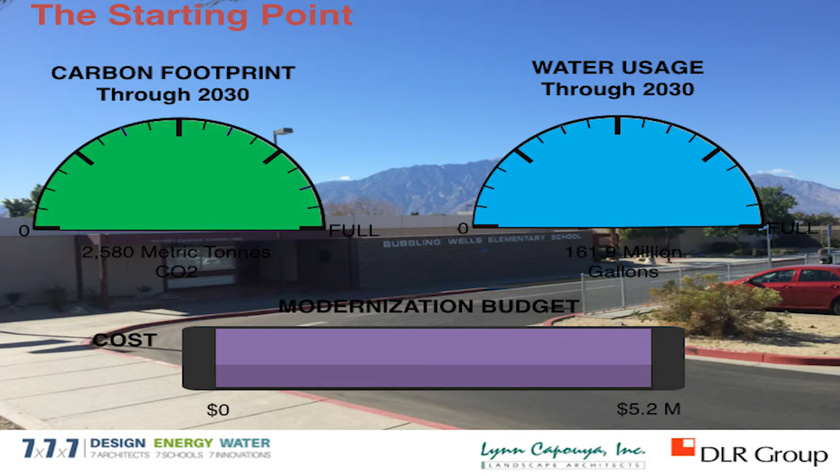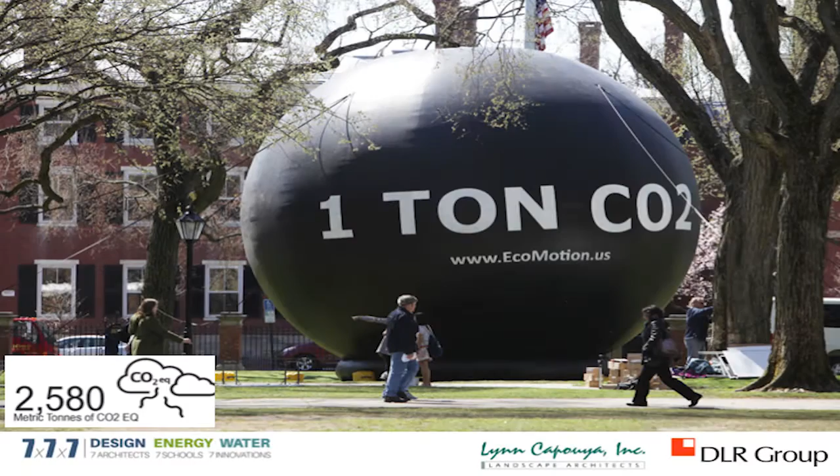So we are projecting that over the next 15 years to 2030 this building would emit about 2,580 metric tons of CO2. The projected water footprint is 161.9 million gallons of water. So if anybody's curious, this is about what 1 ton of CO2 looks like. And about 161.9 million gallons of water would fill 245 of these swimming pools.

So what we were looking at here is taking our zero net energy approach through these series of steps. And then also we'll look at the water reduction. 25% was our target, but obviously we want to go farther if we can. And then we compared this against the OPSC modernization budget, which would be about $5.2 million for this particular project based on their pupil ADA count.

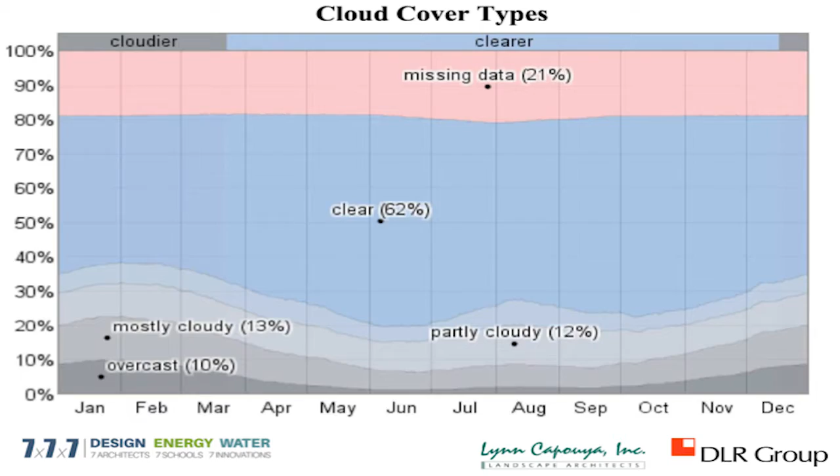So if there's anything other than sand that is abundant here, it's the sun. Desert Hot Springs sees an average of about 330 days of sunshine per year. Making use of the sun for daylighting is logically the most effective way to reduce energy consumption. Tubular daylighting devices have grown more efficient and less costly over the years. Just 4 devices per classroom will eliminate the need for electrical sources of light for the entire school day for 90% of the school year.

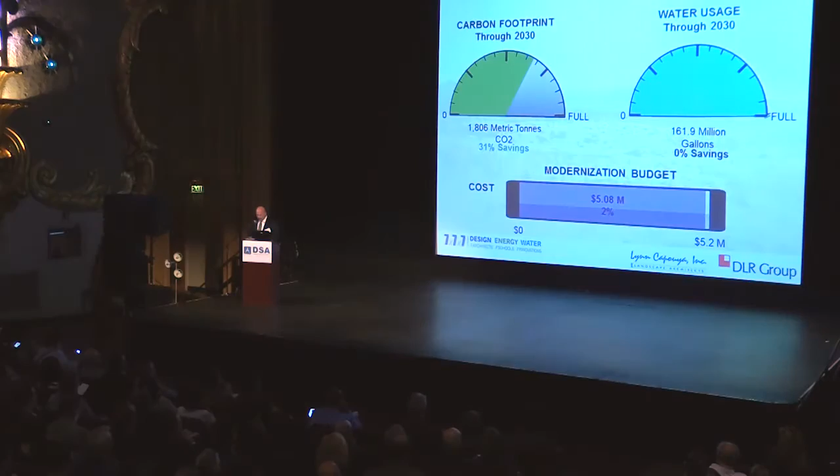That's pretty good. Natural light also offers well-documented benefits for the students' health and learning retention. Along with existing large view windows and the addition of the tubular daylighting devices, I think the learning potential for the students at Bubbling Wells will be significantly increased from its current state. So by coupling this technology with LED lighting for the overcast days and evening use, we can reduce our projected carbon footprint by 31% right off the bat with just 2% of our modernization budget, which is a pretty good ROI at that level.

So let's take mass out of thermal mass. Thermal mass is why the rock outcroppings and caves provided the welcome comfort for the Cahuilla tribes. The same principle is in play with Trombe walls filled with water in the 1970s, to absorb and release energy. Now we can utilize this same concept, but with a modern twist. With biophase change material, or bio-PCM, we can practically eliminate the need for air conditioning, even here. Resembling bubble wrap, this material can be laid above existing ceilings or installed in walls, kind of like insulation. It absorbs and redistributes energy, much like traditional thermal mass elements.

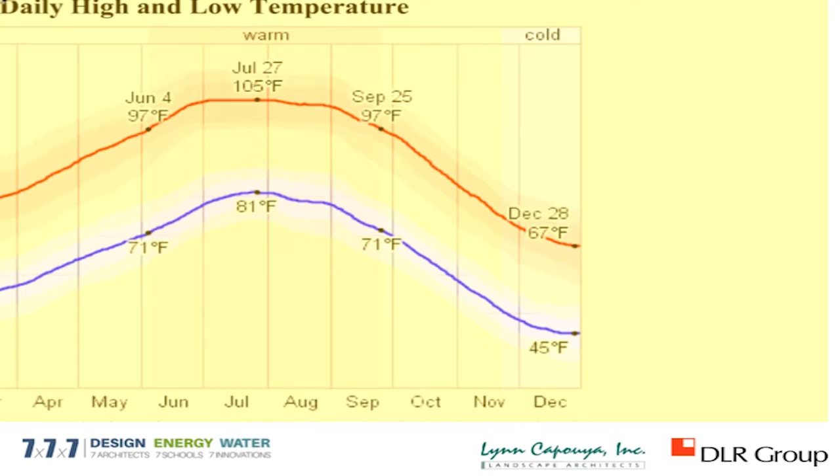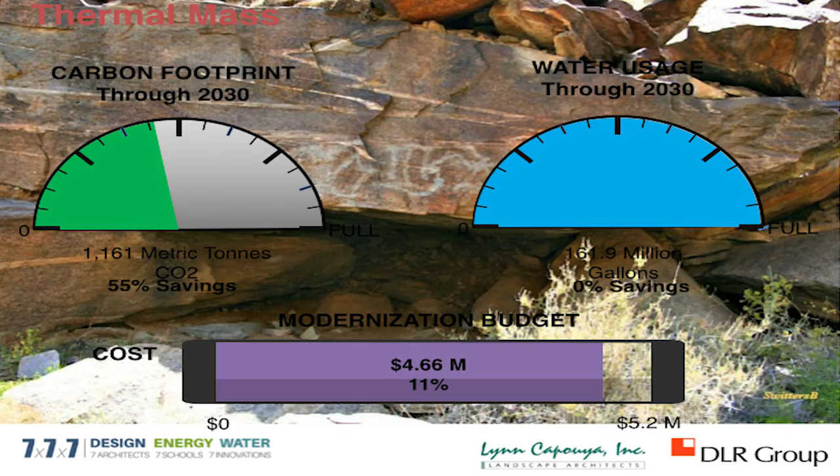Desert Hot Springs has an average yearly temperature range from 45 degrees to 105 degrees. These bioliquid pillows are filled with liquid that freezes, or phase changes, at about 68 degrees, making it ideal for this environment. This will limit the temperature swing throughout the day in the classrooms to less than 10 degrees throughout the year. So the energy savings from the use of the bio-PCM is 24% of our carbon footprint. So we've already gone over the halfway point, and we're on step 2. And the cost for this material is about 9% of our construction budget for 1,200 square feet per classroom.

So, but what about those extreme days that we can reach nearly 120 degrees here? Well, evaporative cooling is the earliest known form of air conditioning. It has been traced as far back as 2500 BC with the ancient Egyptian cultures.

So as we're looking at this, the Adams Hotel in Phoenix, Arizona, which we had an office there, I didn't know about this, first demonstrated swamp cooling, as it was known back then, in 1916, where they draped damp fabrics over the balconies. It kind of came down like curtains, and the air cooled the guests at night. And what's interesting is you can actually do this at home, and it works. I tried it. It's about 8 degrees.

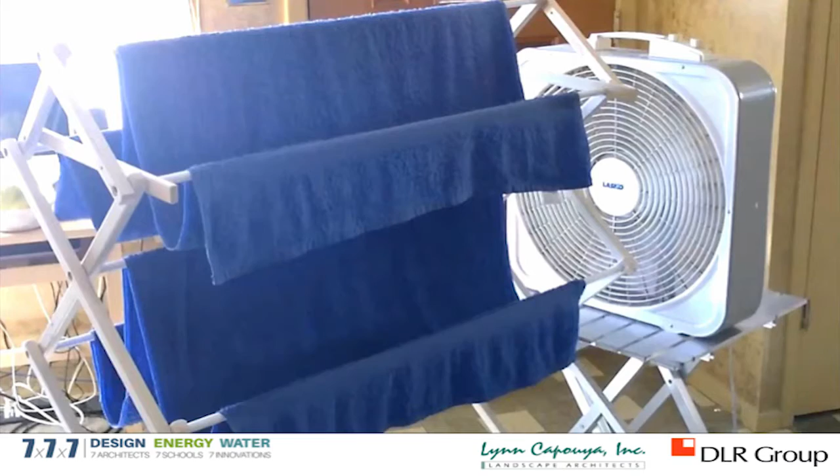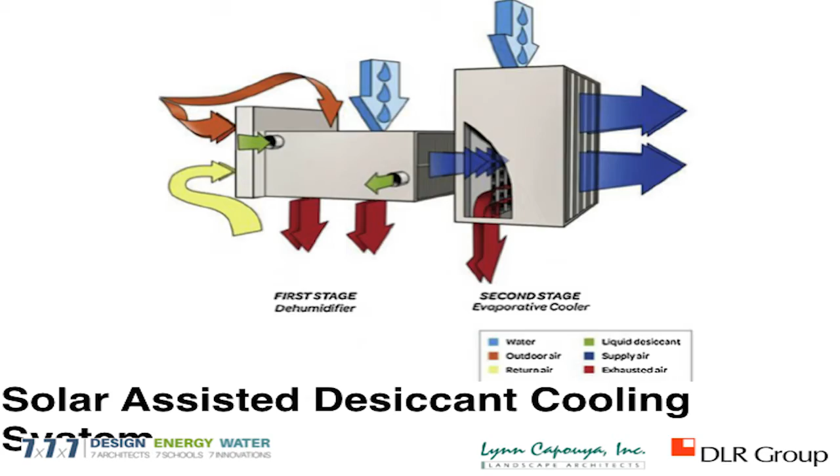So with the installation of BioPCM, the cooling load is substantially reduced. So we can replace the existing 5-ton package units for each of the classrooms with a 1-ton desiccant cooling unit. So these units will primarily run on their economizer cycle only to infuse air into the room to charge the BioPCM material. But they also have enough cooling so it can handle those really hot days.

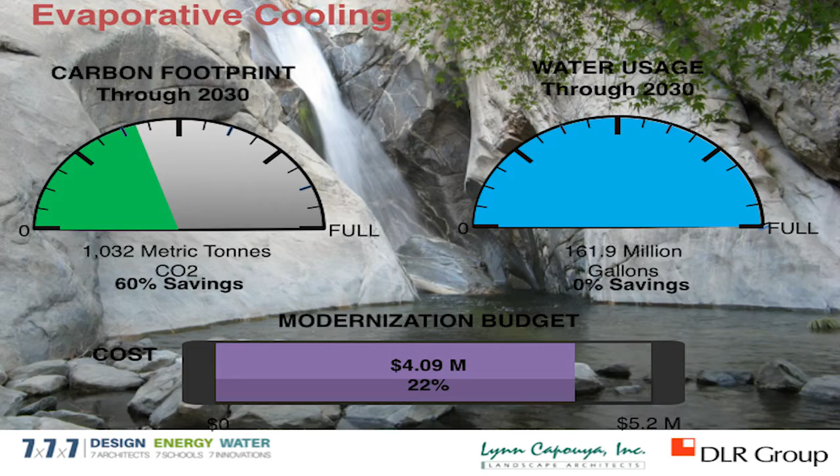So replacing the existing HVAC, it further reduces our carbon footprint. Now we're down to a 60% savings, and this was 22% of our budget now. And a lot of these items are things that you would do in a modernization budget anyway.

So the windmills in the San Gorgonio Pass supply enough energy to power an average of 300,000 homes, which is pretty much all of the Coachella Valley. They have become iconic sculptural symbols, not only for clean energy, but for welcoming us to the Coachella Valley as well. The average wind speed in Desert Hot Springs is between 6 and 11 miles per hour, with a significant amount of days well above 15 miles an hour and greater. So if you've ever been there, you know that the wind definitely makes its presence known. You always know it's windy, especially in the mornings.

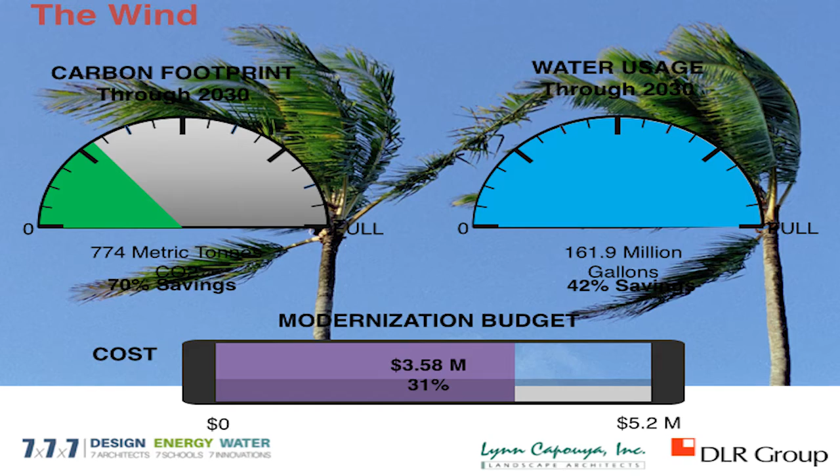So we are proposing the installation of 8 vertical axis wind turbines, each with the ability to generate about 10 kilowatt hours per day of electricity. This equates to about 10% of the total energy needs, or enough to operate the general and emergency lights in all 32 classrooms and support spaces for those rare cloudy days and when the school is in use in the evenings. So perhaps one day the wind turbines at these schools can become as iconic as the ones in the pass.

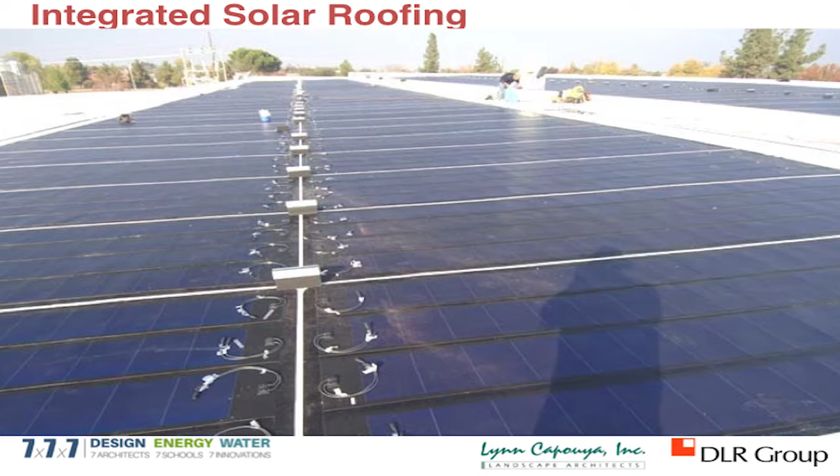So collecting energy from the sun has fast become probably our most promising source of renewable energy, particularly out here in the Southern California deserts. The ever-present sunshine in this particular area can produce energy from 9 to 12 hours per day, making solar collection extremely efficient out here. So building integrated photovoltaic panels are intended to replace conventional materials on the buildings, such as the envelope, the roofing, the windows, even the facades. We're proposing to replace 60% of the existing roof with a thin-film, flexible, integrated PV, adhesively applied to the roof, similar to other built-up roofing systems.

So with the installation of the integrated solar collection approach, our final step here, in tandem with our previously proposed measures, we have arrived at a zero net solution for Bubbling Wells Elementary School. But you want to ask the question, can we go someplace farther than that? And that's where it gets interesting.

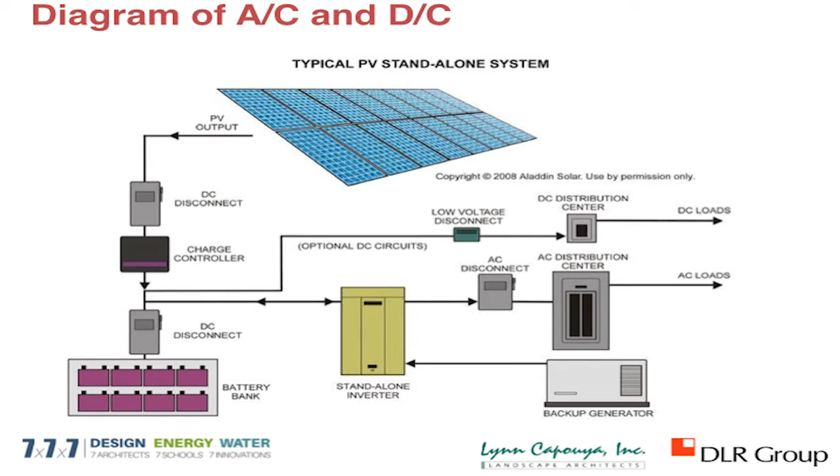So let's cut out the energy middleman. Conventionally speaking, once electricity is produced, we then convert it from DC current to AC current so it can travel long distances more effectively. With on-site generation, there really is no need to transport the electricity. Meanwhile, education has become more and more reliant on battery-powered devices such as computers, tablets, smartphones, LED lighting. All of these require DC, direct current. This means that the AC is then reconverted back to DC via the use of adapters. So a lot of energy is lost in this translation. The question becomes, can we generate and store the direct current for these uses?

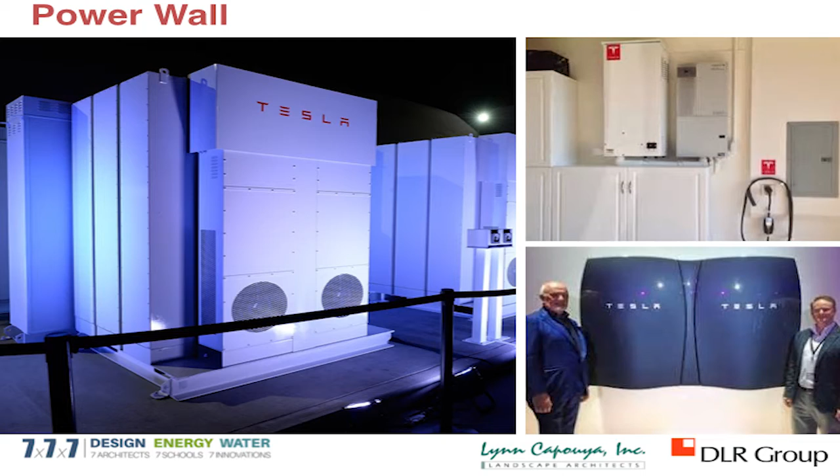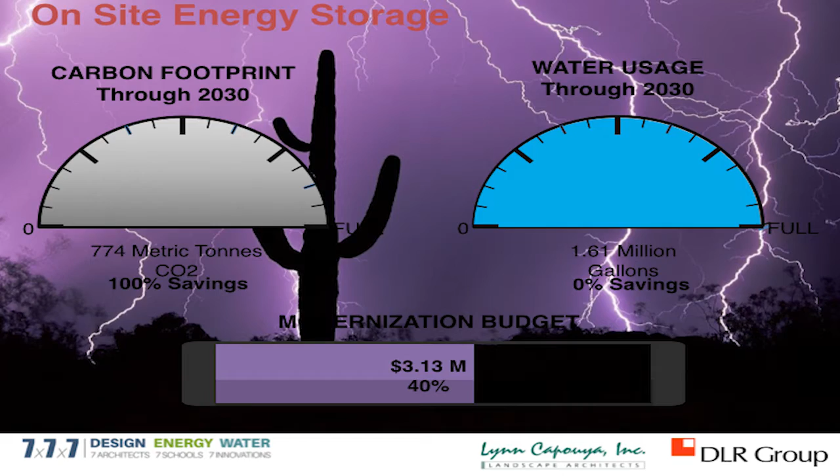And you know, Tesla now offers this large capacity battery storage known as the Powerwall. A dozen of these units can store enough electricity to operate the general and emergency lighting for all the campus when needed, and the educational devices for instruction. And this technology continues to grow and get more efficient because of the competitiveness of the auto industry. So capturing the sun and the wind, coupled with the ability to store this energy, gives us not only the tools for the zero net energy school, but without any reliance on the grid, which I think is our ultimate goal.

So, water. Sand, not grass, is native to Desert Hot Springs. So many schools in California are responding to this recent drought and the stricter water mandates. They're opting to replace their grass with artificial turf. Now, due to the intense heat of the sun out here, this is not even remotely a practical solution for these areas. So once again, we looked at our local history and resources to see if we could find a better solution.

Seashore paspalum, took me a while to learn that pronunciation. It's a common grass varietal used in much of California. Although originating in Africa, a California hybrid is grown locally in the area in the Coachella Valley and Escondido. So the drought-tolerant Bermuda variety is extremely resilient to high traffic, very hardy for hot, dry climates, and most of all, requires far less water to flourish in this area.

So with efficient irrigation, the drip systems that we have, a 15% reduction in the amount of turf on the campus, still keeping some playfield, and replacing the existing turf with the seashore paspalum, the resulting water savings is already 40% of our annual budget. We all know that irrigation takes the most water. But let's not stop. We can go farther.

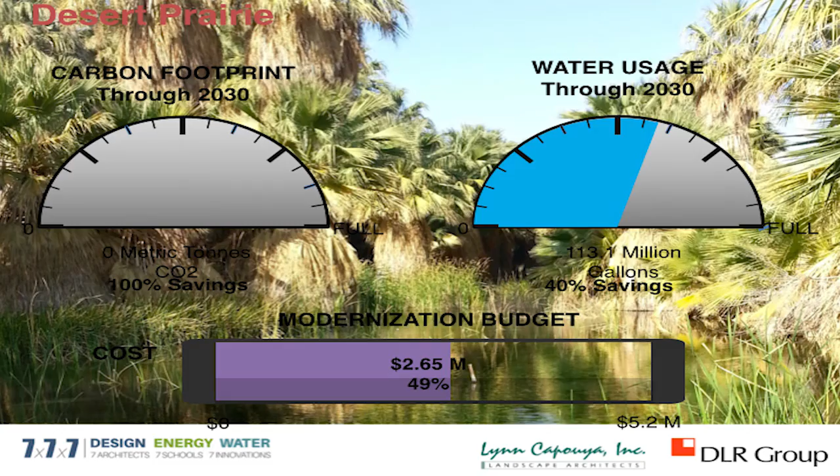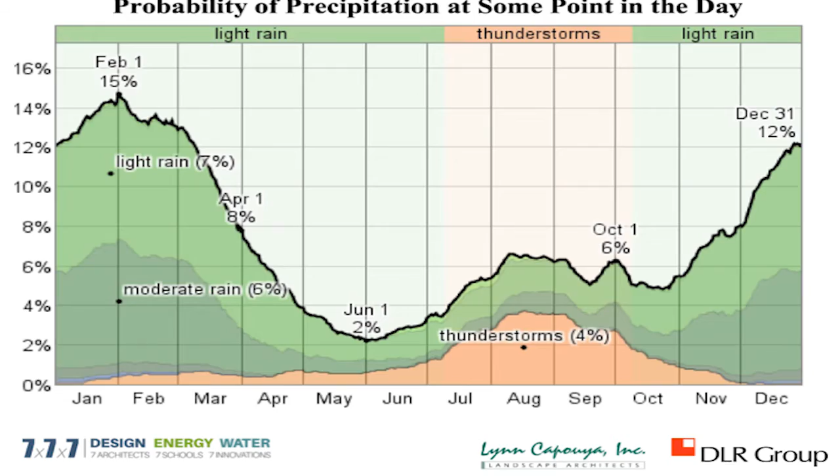So an oasis in the desert. This is a metaphor for finding the unexpected place of comfort and rest. We love camels, everything about it. So water for this region is mainly supplied by recharging the aquifer from the streams shedding water from the snowpack on the San Jacinto and the San Gorgonio Mountains. So mimicking this process, we're proposing to create a campus-wide bioswale system to cleanse the waters and to allow it to temporarily pool along the way, kind of like a natural stream would.

And then the California fan palm, one of the only shade sources indigenous to this region, will become the main feature for the new landscape. Grouped together, these palms create a series of oases, providing shade, psychological and physical cooling on the hot days, as well as a unique and fitting outdoor learning environment for students to understand the precious nature of water in the desert.

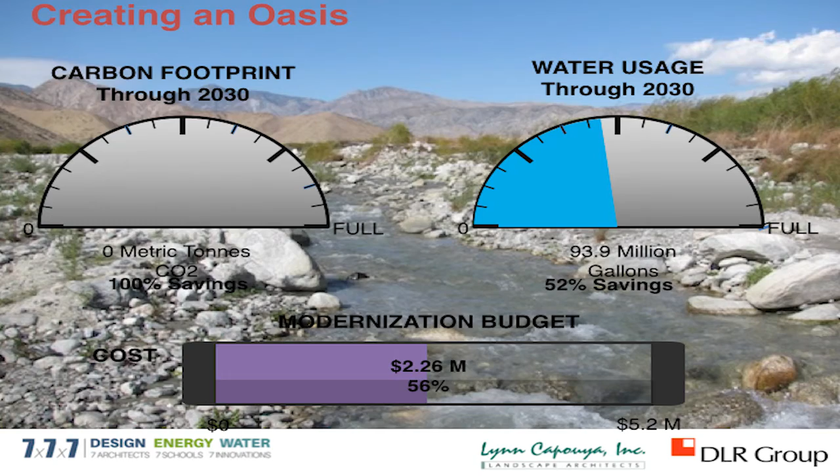Water collected from the irrigation runoff, the occasional desert storm that runs through, and the gray water from the campus will filter through these streams, providing sufficient water for the oasis to survive on their own. This new landscape palette and filtration system, with the reuse of the on-site water, will further reduce our water budget now by another 12%. So we're getting there at 52% savings.

So what if we could generate water from thin air? Condensation forms on surfaces when the heat is emitted at a greater rate than it can evaporate. This phenomenon is most visible in early morning and late evening when the ambient temperature is the most dramatic in the daytime. So based on this concept, there's a company that has developed and is patenting technology capable of capturing water from the air. This is possible when the relative humidity is above 25%. Desert Hot Springs is ideal for this approach with relative humidity averages throughout the year between 52 and 83%.

By using the wind to power a series of cooling compressors, creating a heat exchange, we would mimic this model that we're seeing here, which activates humidity condensers, which then produce water. With 8 condenser units, each with a daily capacity of creating between 250 to 400 gallons of water, we can produce and store, on average, 2,600 gallons of water per day. This is enough water to operate our desiccant cooling units that we presented earlier, as well as about 10% of our irrigation budget on the campus. So now we can add water to the on-site generation category of the LEED score sheet.

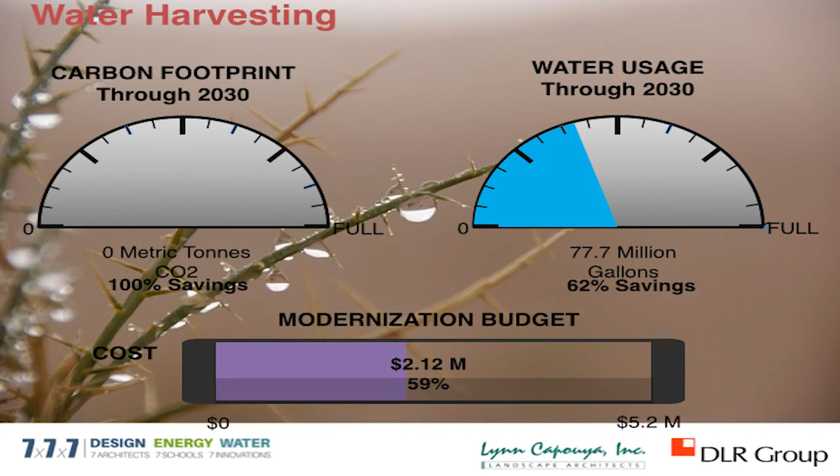So we've explored some innovative concepts for providing a zero net energy solution and reducing our water budget by 62%. More recent advances like the BioPCM and the on-site DC current usage, as well as the water harvesting, will continue to increase in efficiency and reduce in cost and make them more viable solutions over time. But 60% of our zero net energy solution was achieved with the use of passive measures only, which is where we need to go. All of these solutions are grounded in an understanding of the history and the appreciation for the reality and beauty of the desert environment.

The necessity of controlling our carbon emissions has become alarmingly clear to most. The question now is how to reverse this trend in our energy and water consumption and eventually live once again in harmony with our environments. Times do indeed change. It took more than a generation for students to become digital natives, where they actually grew up with internet devices as part of their reality in their everyday lives. We need to set the course for our next generation of learners through curriculum and life experience to become the generation of conservation natives.